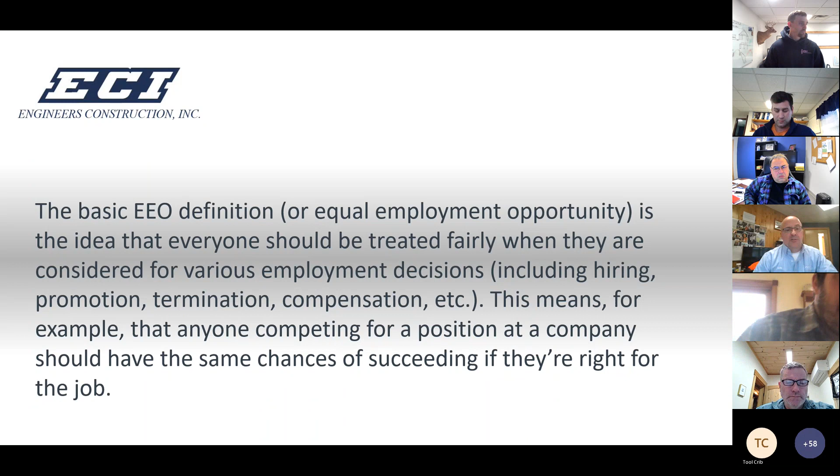So some further explanation of that is upcoming, but part of our culture is our commitment to fostering, cultivating, and preserving a culture of diversity, equity, and inclusion. And we'll always remember in our culture that our differences give us our strength as a company.

Our code of conduct is also part of our culture, and our code of conduct and standards are meant to provide a professional atmosphere free from harassment. These two statements are just two little tidbits that are in our handbook that talk about our culture and who we are. And to be an equal opportunity employer is also required.

It is required that every employee here practices it, because if one person breaks it, we're out of compliance. A lot of our contracts, the state work that we do, everyone knows that we have to get the poster boards up, and I'll talk about that in a little bit.

But the reason we have to put something on that poster board related to EEO is the fact that it's required by federal law when they give us funds for our projects, like the Federal Highway Administration, for example, that we follow and adhere to and have an EEO program.

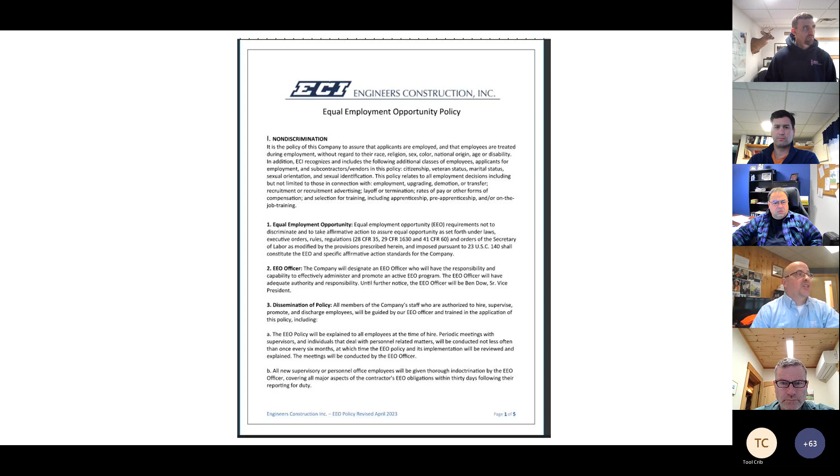Another question you're going to be asked: who is the EEO officer? Ben McKinney? Incorrect, it is not Ben McKinney. It's Ben Dow. I am the EEO officer here at ECI, and everyone's required to know that, because if somebody feels that something inappropriate is happening, just let me know.

I'm the EEO officer, and I have the responsibility to administer and promote an active EEO program by ensuring the company has the right policies and procedures in place, and that this stuff is given to you in a way you can understand and follow. I'm responsible for handling all complaints appropriately according to the policy, rules, laws, and regulations. That's the more legal part of it.

Our EEO program also involves a couple other things. One is that we are committed to providing reasonable accommodations for employees with disabilities. We have a written reasonable accommodations procedure to handle requests related to the ADA, the Americans with Disabilities Act. Those might be things like a special handle or a step on a truck, or a ramp. Anyone with a disability who needs a little extra help, that's considered reasonable, and we have some leeway there. We're committed to taking care of that for them.

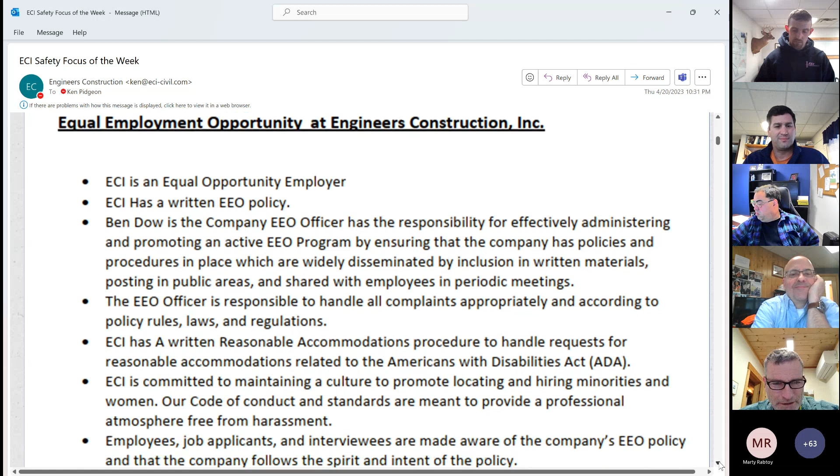Okay, there's the quick, some of the bullet high points. Yep, yep. And the link is at the bottom. Oh cool, thanks, that's good.

There we go. Okay, no new announcements this week. We have new employees though.

This is Stephen Downs, and Porter Peliquin, and John Schruger. I think he pronounces it Sugar. Sugar, okay. And Cameron Bailey. Whoops, I went past Cameron here a little bit because I scrolled too fast. Cameron Bailey. So good, welcome everyone.

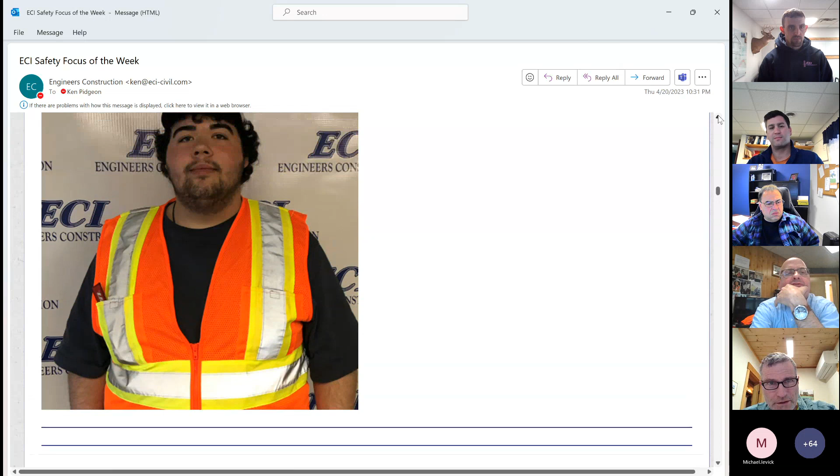There'll be a quiz on the EEO policy later, right? Yeah, just remember, Ben Dow is the answer, and yes, I've been trained.

So this week, ECI participated in the 2023 Vermont Career Fair at the Champlain Valley Expo Center. Here's their little logo. You see it is also sponsored by the AGC of Vermont, which we're a member of. AGC is kind of the driving force behind this. It's mostly about construction careers, but it's a whole lot more.

So we had a booth there and also an outdoor presence too. Our sign had the message, ECI is hiring now, as in right now. That's cool, yep.

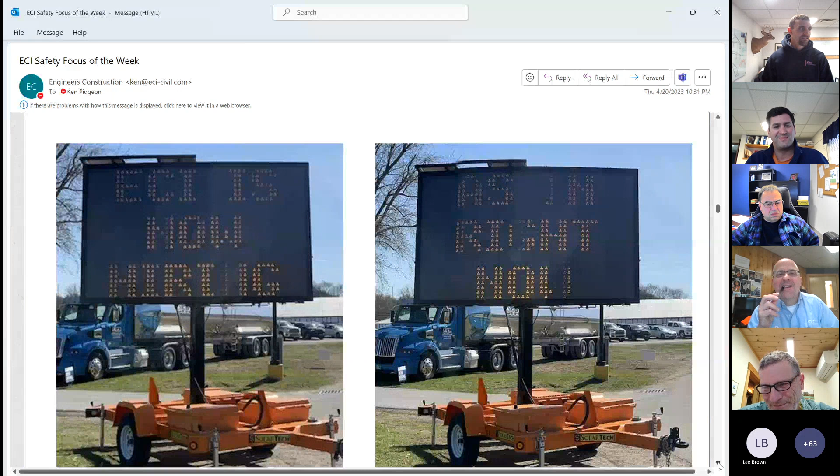And let's see here. The first part was mostly young people from the tech centers, and they just inundated us and the whole place.

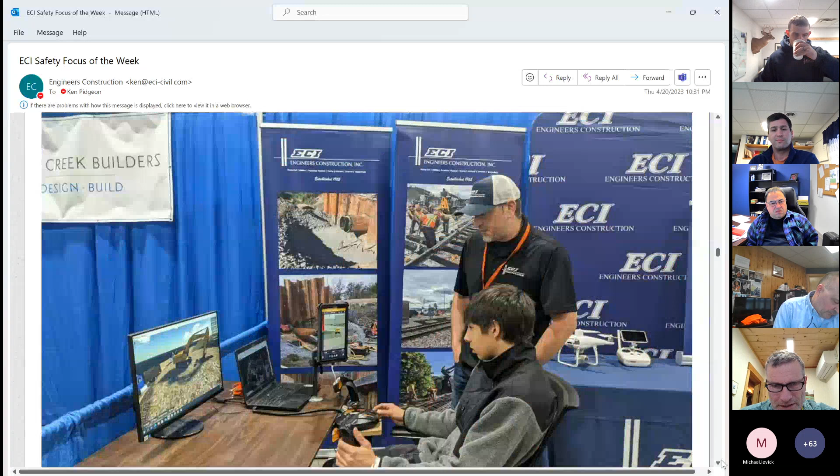And Richard is here showing this young man how to operate an excavator using our simulation software and hardware.

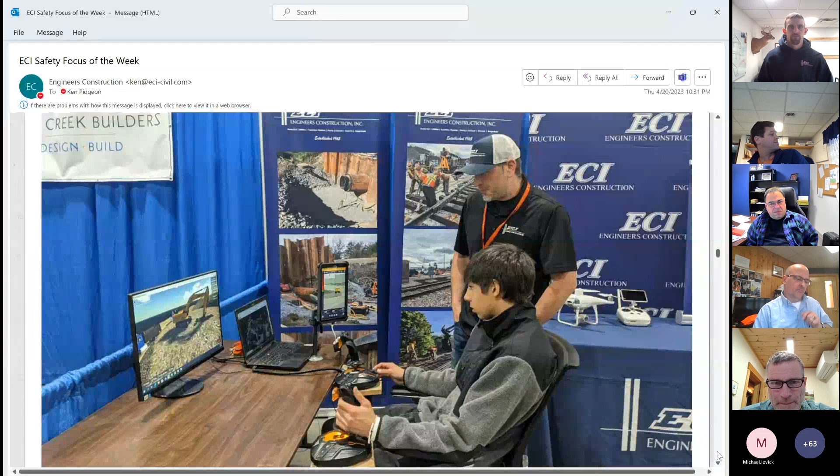And then I also got another link, obviously, like we always do, to the primary wellness care program. So we got to get back in, if you haven't had your update, your yearly physical, you got to get in and have it updated so that you're compliant with the program. And if you haven't done it, and if you're new, check it out.

It's really worth it. And then for this week, we're going to have Ben McKinney talk to us about the chip unloading bridge repairs at the McNeil Generating Station in Burlington. All set, Ben? Yeah, all set.

ECI is contracted with Burlington Electric Department to do 2 separate scopes of work during their annual spring shutdown of the McNeil Generating Station. The chip plant, as it's often called, is a wood-burning power plant located in the Burlington Intervale that generates 50 megawatts of electrical power.

That's about what the city of Burlington consumes. I'm sure you guys have seen it and can picture it down there in the swamp with the big smokestack. The plant runs 24 hours a day, all year long, except for a 2-week shutdown each spring.

This shutdown is timed in early April to coincide with the mud season, when it's more difficult for loggers to get wood and chips out of the forest. The McNeil plant burns 75 tons of wood chips every hour, or about 630,000 tons per year.

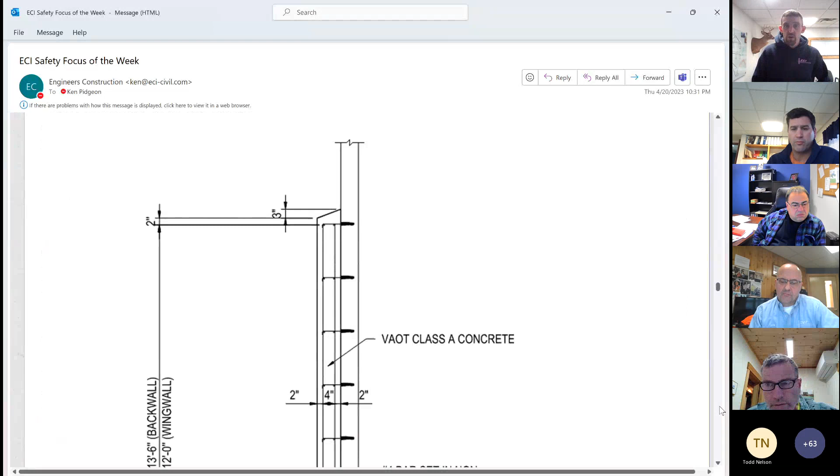ECI also poured reinforcing blocks around existing columns and replaced CMP bollards to help protect the existing steel building structure. So this over the bridge, Ken, if you want to show them the picture, but over the bridge is a building that's on the low side anyway of the bank. Columns go all the way down to grade and they're in this loader yard. So we formed and poured cast in place concrete around some of these big steel tube columns to protect them as extra work. We picked up quite a bit of extra work while we were down there. I get that picture right here, you mean?

There you go, you can see these columns are actually... those are the piers. We didn't do any work on those, they're cast in place. But then you can see these big HSS columns, if they're 8x8s or 10x10s, they're big, maybe bigger than that.

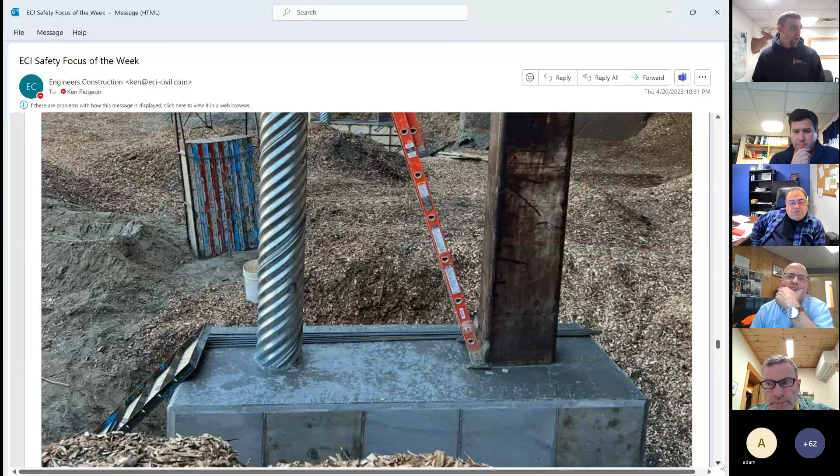Maybe 14x14, I don't know, they're pretty big. These columns come down to little piers, and those had gotten some loader damage, and the anchor bolts were kind of rotten. So they directed us to do a bunch of extra work forming these and putting new CMP bollards in there, which are also filled with concrete to try to keep the loaders honest.

Our final design is a 14 to 16 foot tall single face wall.

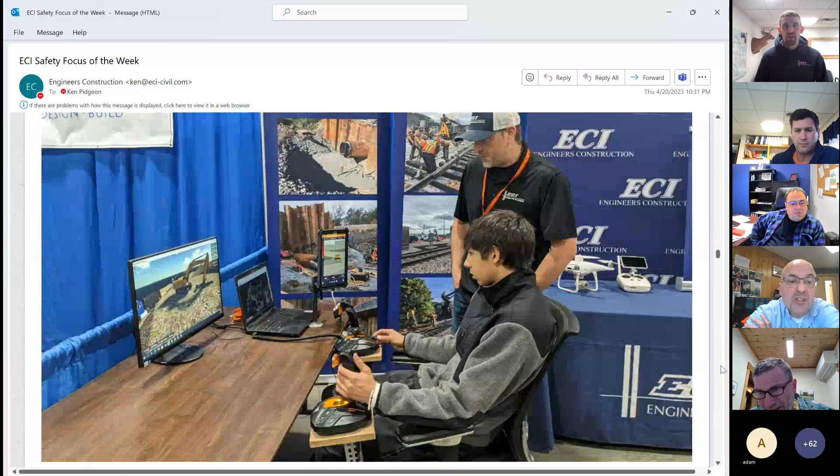Tall single face walls deserve extra caution. Sorry, I went too far, it's hard to navigate, let me get back. I didn't mean to interrupt, but I didn't want it interrupting you.

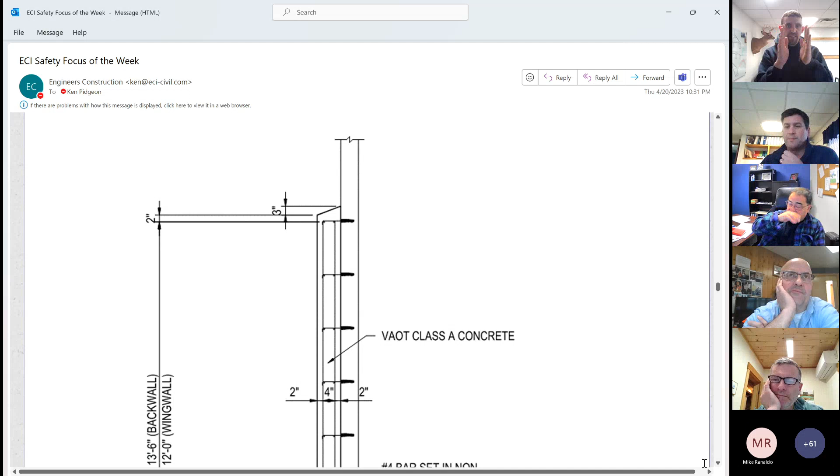Unlike a normal wall where you've got two steel forms on either side with the pressure resolved between them by a conventional tie, you still have areas to be cautious with. But a single face wall, it's just the one face, and you're relying 100% on drop-in anchors into your existing substrate to hold the entire wall. When you get up to 16 feet, the form pressures at the bottom are really, really high. So it's a tricky wall to build.

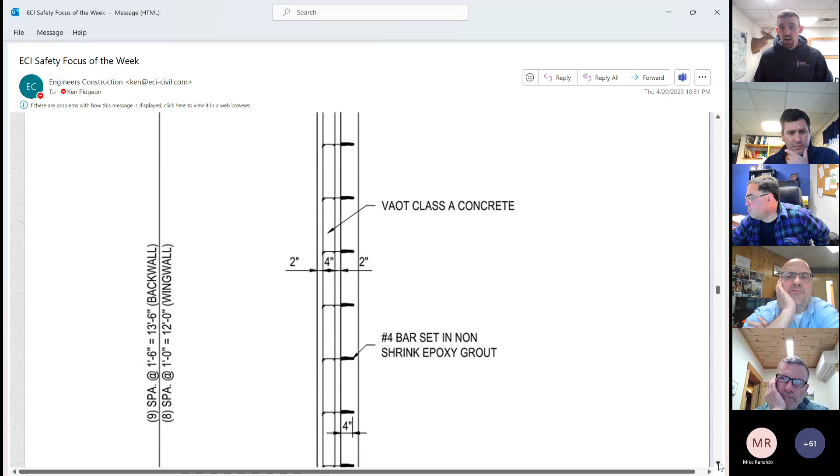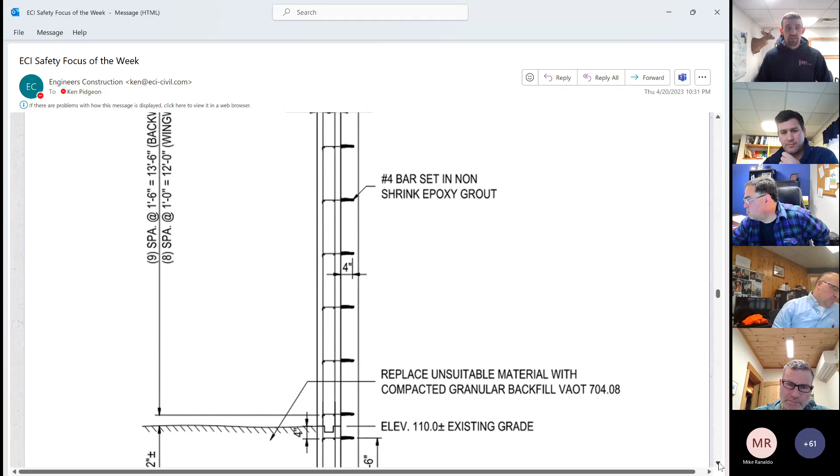The guys did a great job. It was a plant shutdown, so we were under the gun on timeline. They started running trains again the day after we got out of there. We finished our work and all the extra work we did while down there just in time. Reports from the field are that the formwork held like a rock, and besides a few creaks and pops, the pour was uneventful - just like we like it.

So there's the detail we constructed it to, showing the wall - existing wall on the right, new wall on the left. Yeah, we eliminated that keyway, that wasn't necessary. I don't know why they drew that.

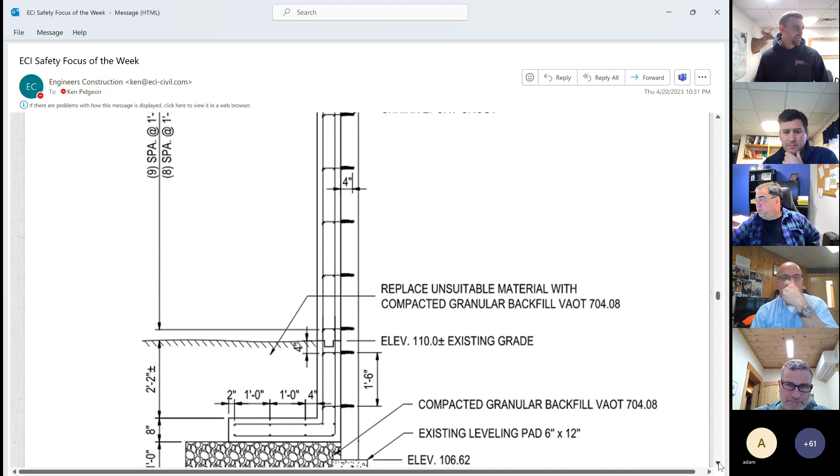It's a lot of groundwater down there. It's in a swamp, I guess it kind of makes sense.

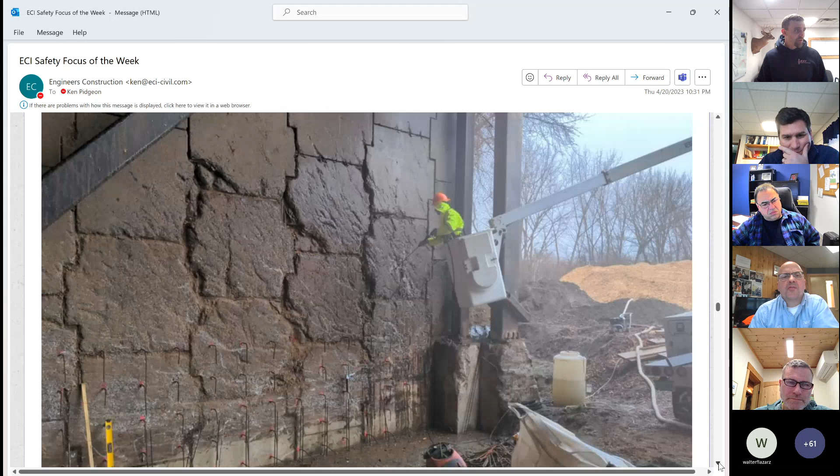Dug down to the original footing there. You can see a pier, kind of a double pier for some of the upper structure. And you can see just the beginning of the dowel drilling - like I said, they're over 500.

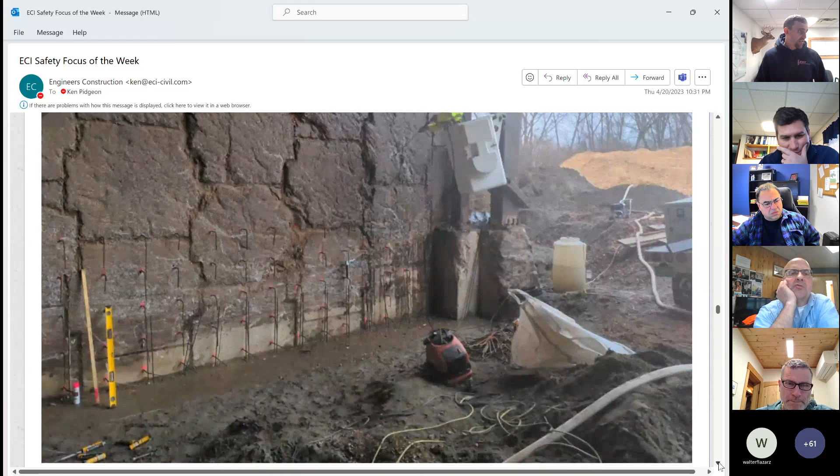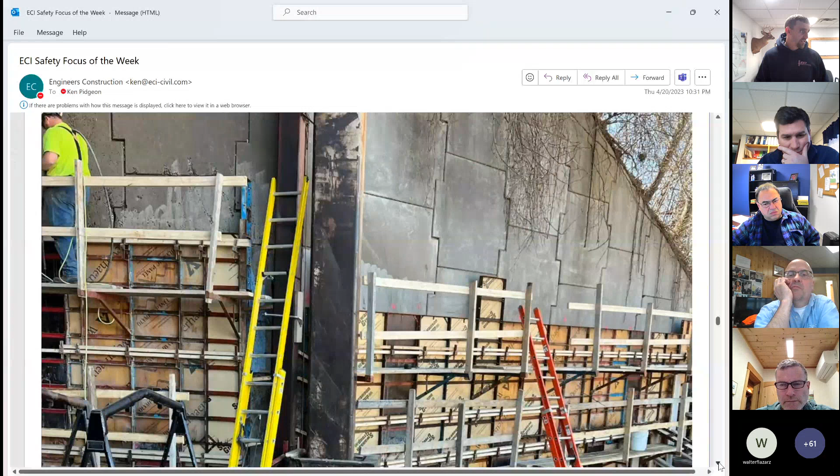There's pour day. You can see we're 14 feet tall on the wing wall, 16 on the one we're calling the abutment wall. It's not really an abutment, but kind of.

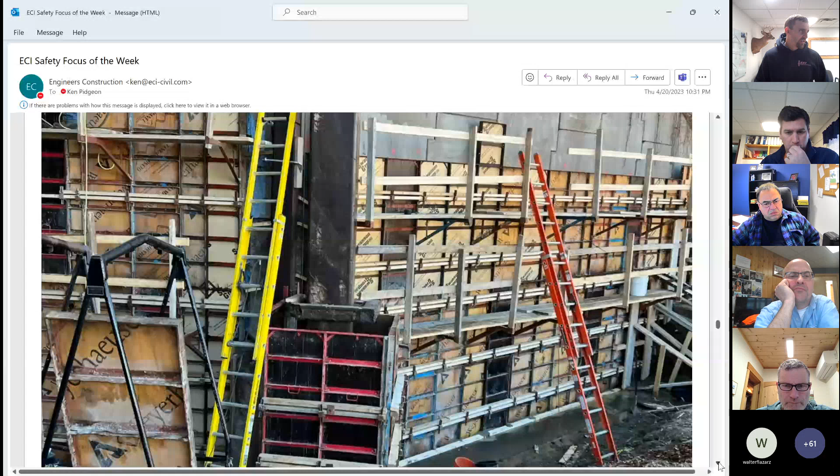There's a pier encasement there up onto the column.

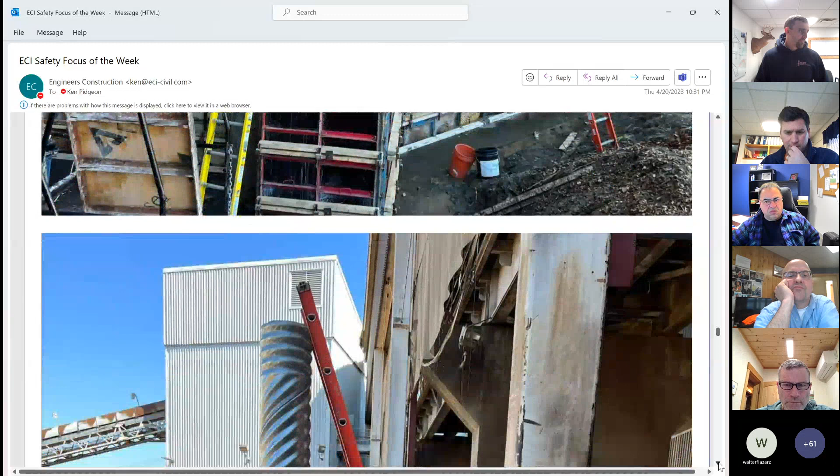One of the bollards we replaced in the background - you can see one existing one that remains, and our nice shiny new bollards with our new encasements to protect those building column footings.

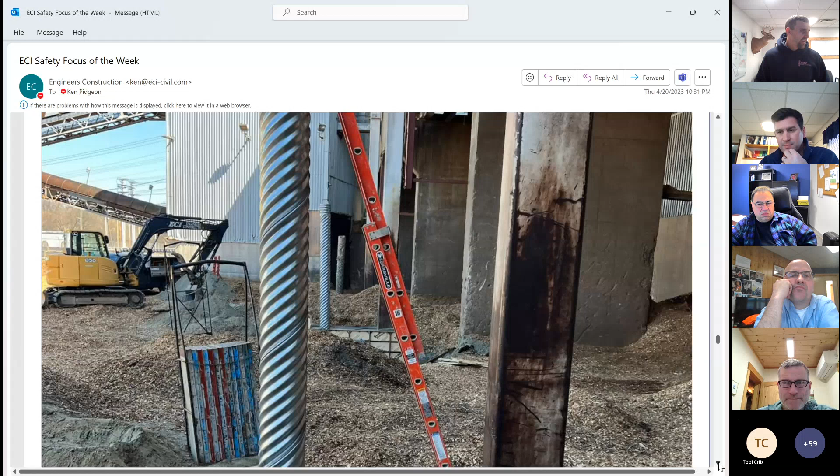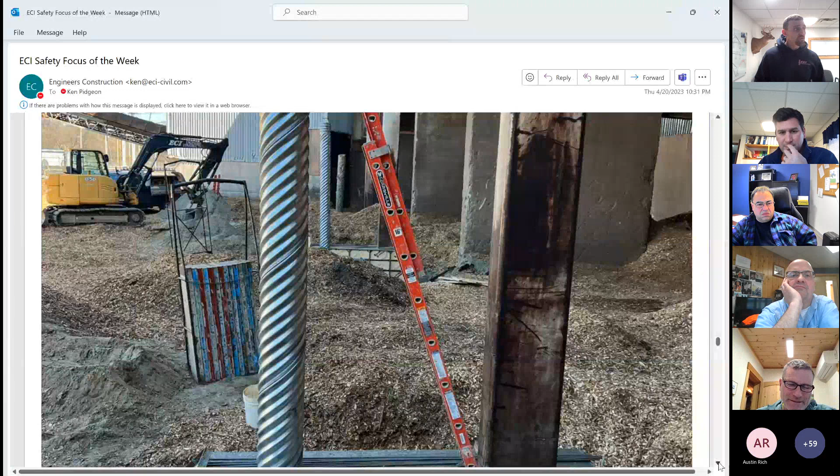They seem kind of small diameter for the height, don't they? If you look at them next to that ladder, I don't think they're that small - it's just you look at them next to the tube and they look small. I called that tube an 8x8, then I looked at the ladder and thought, no, that's not an 8x8. But the height - it's a slenderness thing. You talking about the CMP or the columns? The CMP, yep.

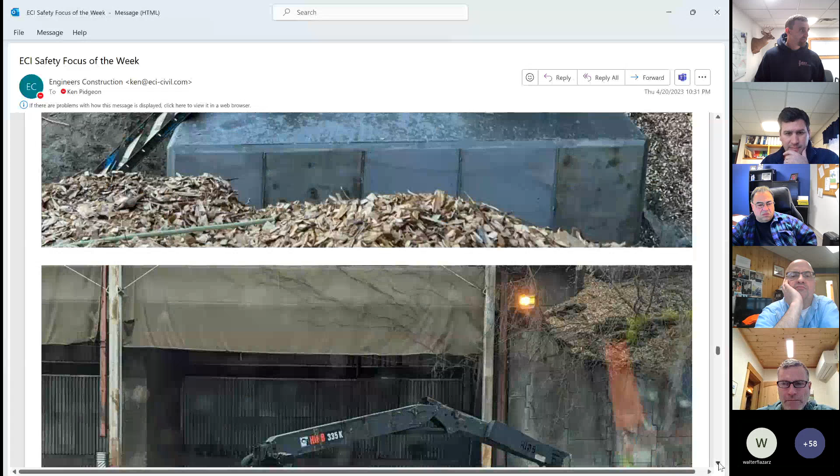Yeah, I mean, I think heavily reinforced with no load, I think they're just right.

You got the form truck setting some waste blocks. Obviously bracing is very important on these walls, and curb pins don't work very well in wood chips, so putting the waste blocks on for bracing is important. Ground down there.

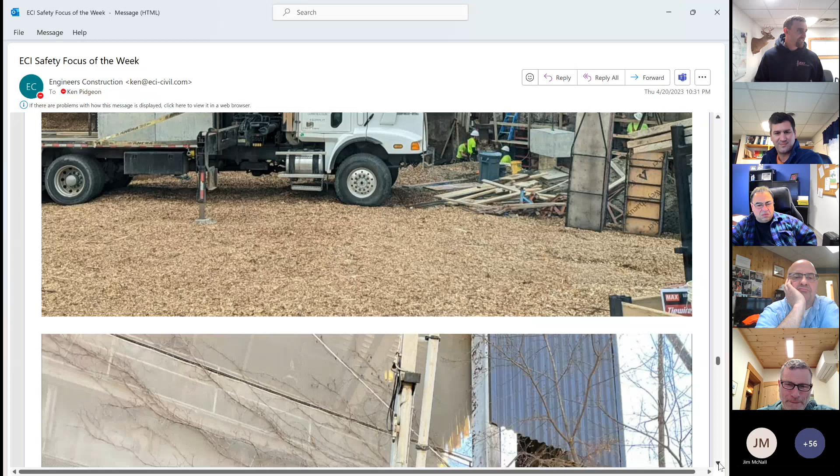Yeah, it's like a nice working surface there. Comfortable on the feet. No smoking.

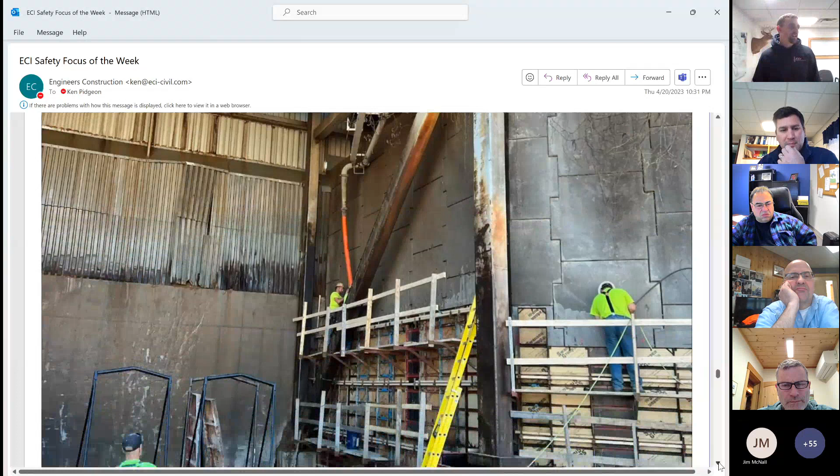It's probably kind of hard to picture how this whole thing goes, but the train's coming onto this bridge, perpendicular to this back wall where you can see Dave running the pump line. They're called hopper cars, open top hopper cars, so they're unloaded from the bottom. The chips just fall all the way down, and the loaders come in and scoop them up - let it drop. Of course, it's normally partly full, right?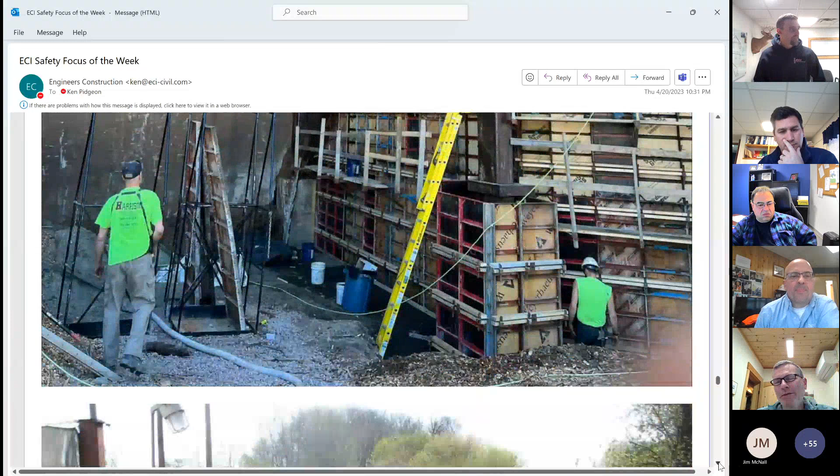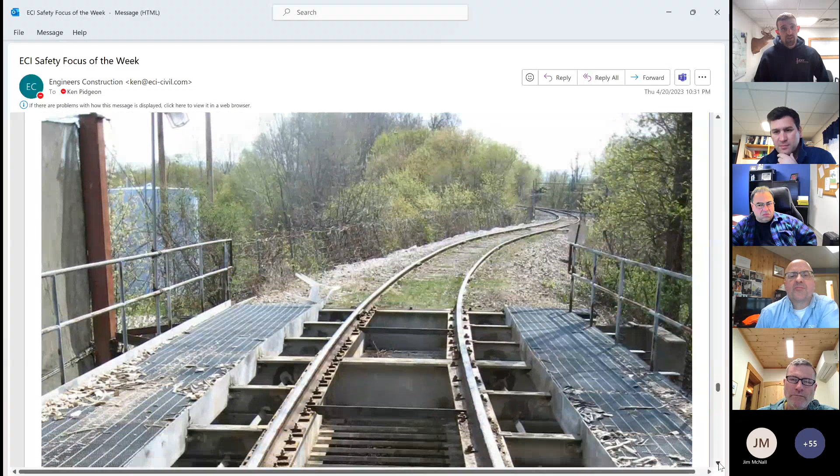It's more full than usual, we had to excavate to get down here. Normally it's somewhat full of chips. I guess they dropped the whole grade down after we left. But you get down 3 feet and there's still chips - just old, wet, dark chips that probably hadn't seen the light of day for a while.

So here's the siding. You can see that aggressive curve geometry we're talking about, and this section of the bridge is actually in the curve. You can see all the clips there on the steel stringers. You see a curve greaser in the background - I don't know if it's operational. I wonder why they have a problem.

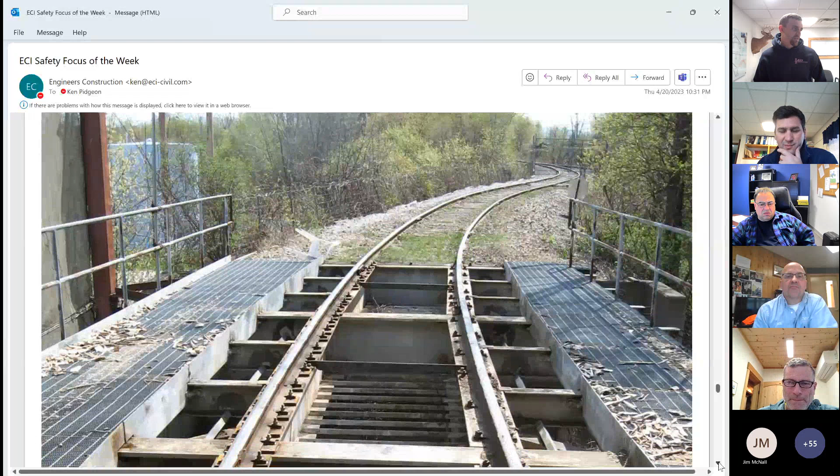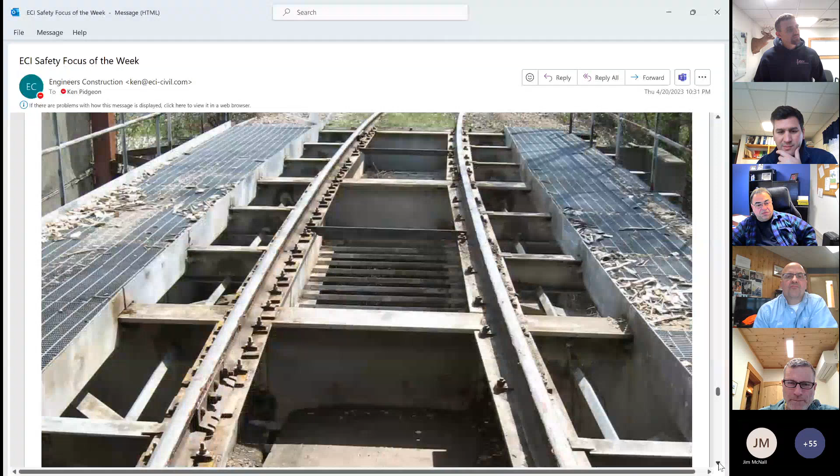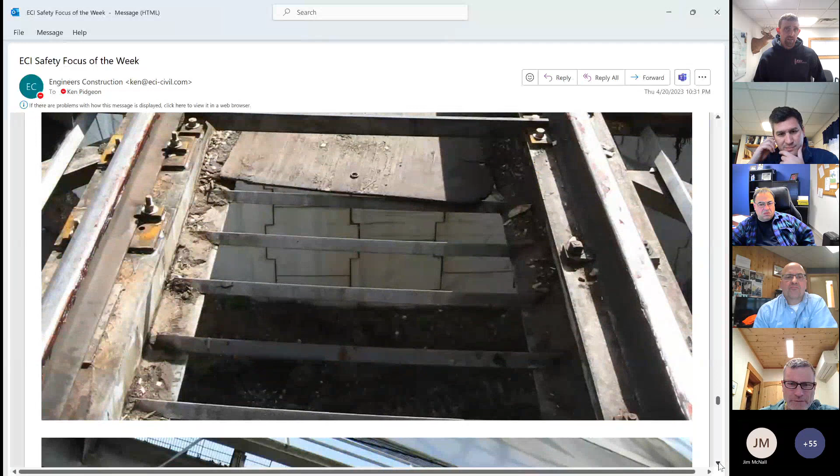Also kind of funny, the spread footing behind the MSE has had some pretty good settlement that we've gone and jacked and done some bearing work over the years too. It's probably due for more next year. They've got a certain budget they try to stay within on the track side every year. This wall deviated from it, but they were able to find the funds. It drops right through there.

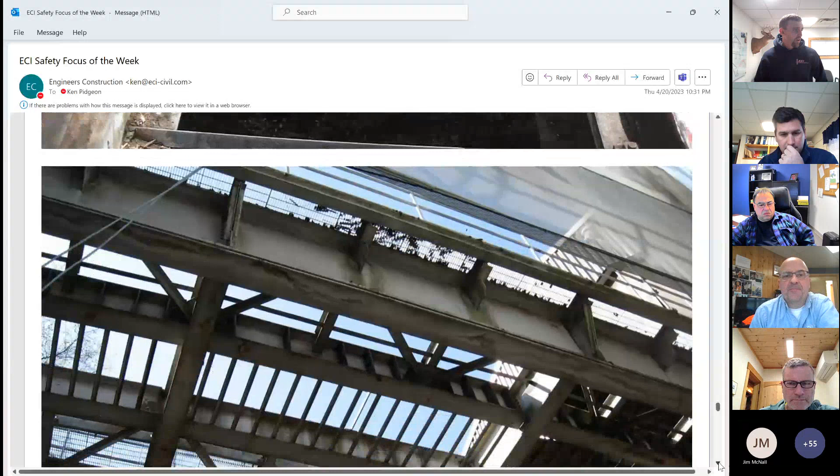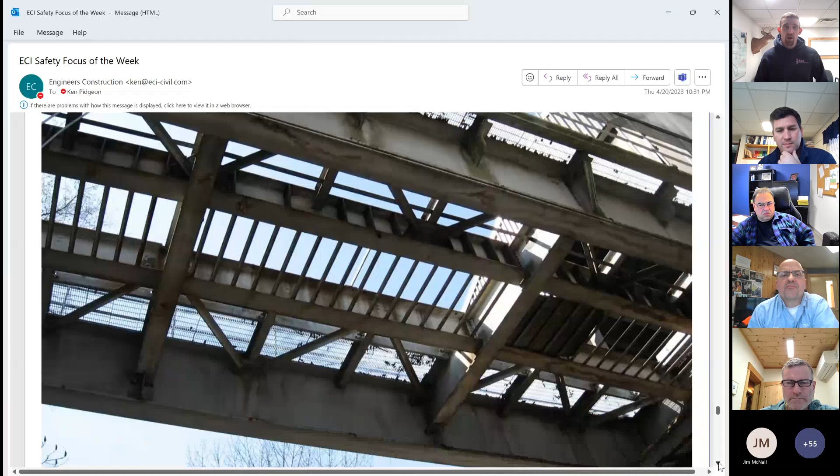Obviously working underneath this, that's why we had to do our work during a plant shutdown. There were a lot of guys in the plant doing work. We had to do it during the shutdown because you can't be building that wall and having big chunks of wood fall on you. Not to mention, working under trains isn't really allowed either.

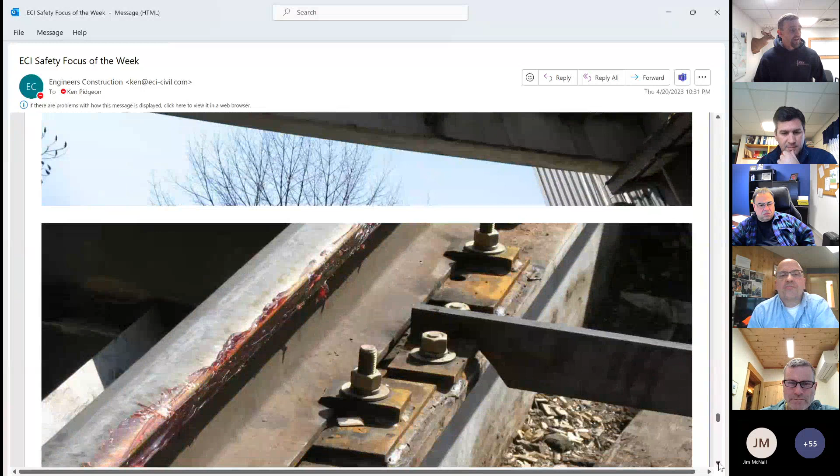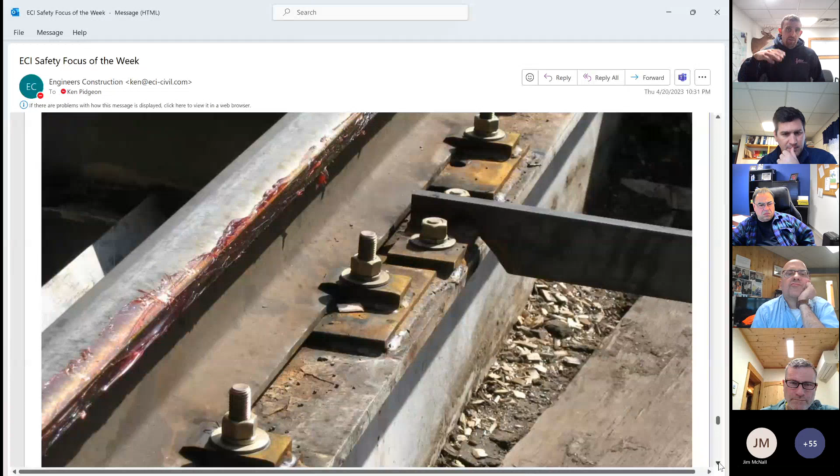They are there every day, and it takes a while. You can see grease - it looks like the grease we used to use, but I assume that's from the curve greaser. It operates on a little cam, and every time a train wheel goes over, it gives it a little pump of grease.

Those are the old school style clips. Yep, they've gone to shoulders with Pandrols, so they're maintainable and have a little bit of give to them. This is an older photo that I had from 2009.

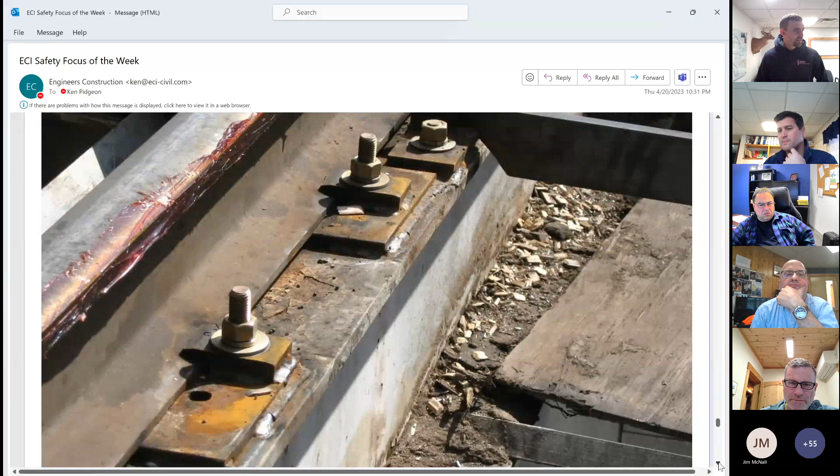Okay, well, thank you, Ben. I got one piece of information for you guys. I don't know if Burns remembers it.

Back in the late 80s, early 90s, one of the jobs that ECI had was unloading the chip trains. In the middle of the day or whatever, you'd get a call on the ECI radio from Allen to go unload the chip trains. It was like the fire department - we'd have to run down there and climb up on that structure.

I don't know if they still have them, but they had big vibratory bulk units that we had to clamp on the sides because they would open up the bottom of these dump cars and the chips wouldn't come out. So we'd have to bang them with hammers, hitch on these vibratory units, turn them on, and get the chips out. It would take about an hour, but it was something we used to do.

It was just part of our culture back then - don't answer the radio because you don't want to have to go unload chip cars when you're in the middle of putting pipe in. Did you know we used to do that, Ben? No idea, I had no idea, that's crazy. You guys are doing pretty good to do it in an hour - it seems to take them longer now.

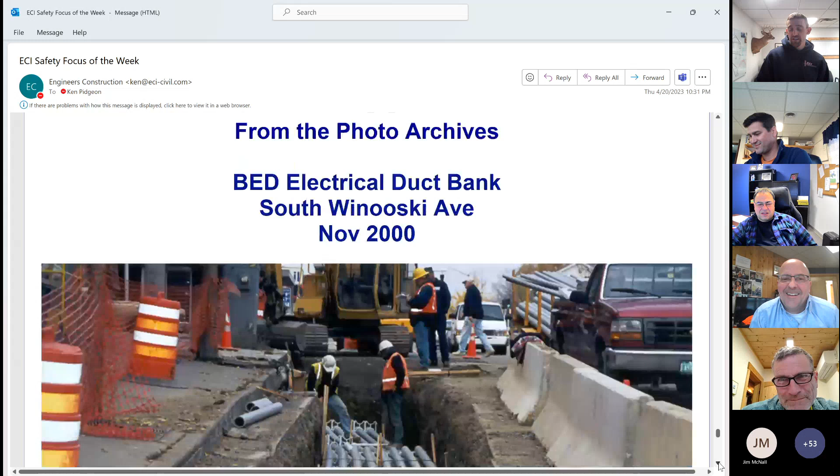The vibration's very, very loud - pretty violent, to be honest. I think it did take more than an hour, but it was frustrating for us because it wasn't a set crew. We don't have any photos of that, unfortunately, in the archive photos.

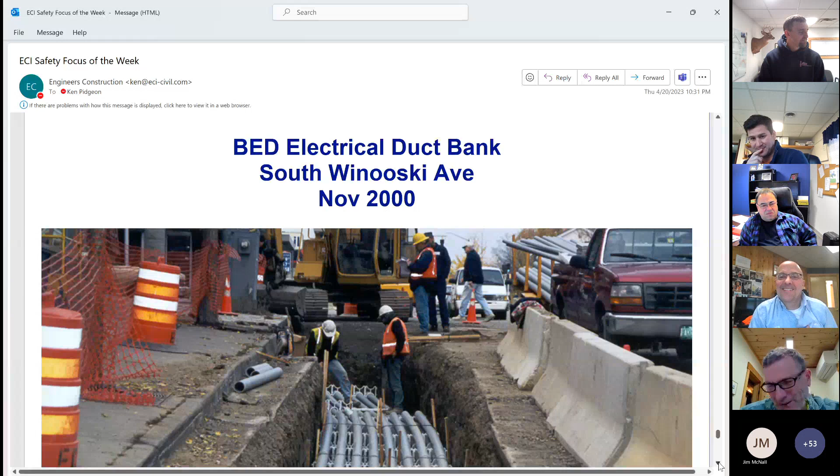We might have this - South Winooski Avenue, doing duct bank work for BED. We used to do a lot more duct bank work. They certainly have some contracts nowadays, a little bit going on here and there, but this was obviously a pretty big duct bank. That's Mark Nash right there.

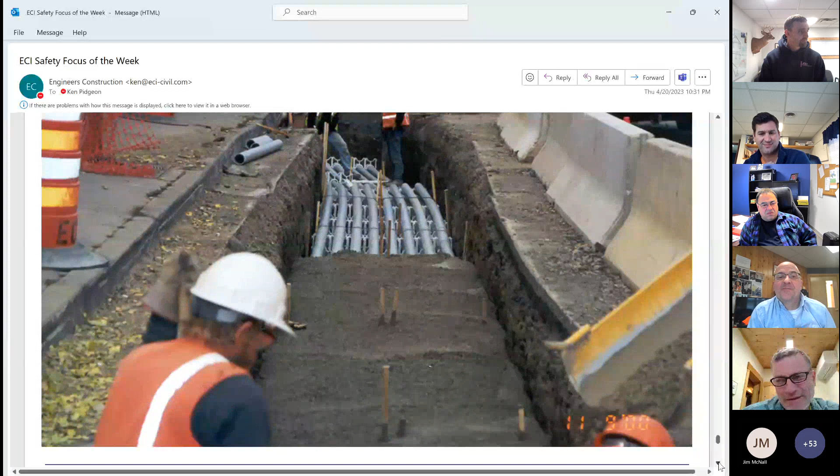Yep, so, nice, all right. Well, that's what I got. So I'll turn it back over to you, Matt, and everyone have a safe day out there.